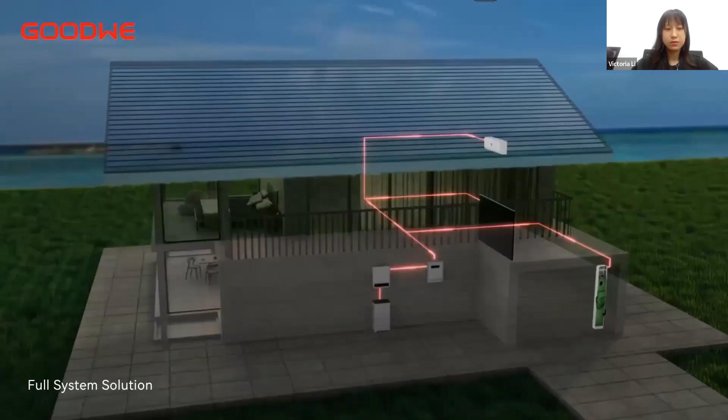Okay, hope you can get a general picture about Sunshine Tile after seeing this video. And this is some technical data about Sunshine Tile. The size of the Sunshine Tile is 1508 by 420 millimeters, and it weighs 11 kilograms. As you can see on this slide, there are brackets that go with this product because it is a necessary part for the installation of Sunshine Tile, and I will talk about it later.

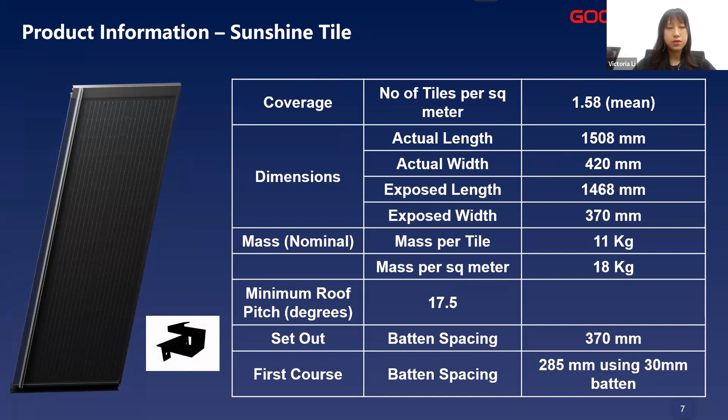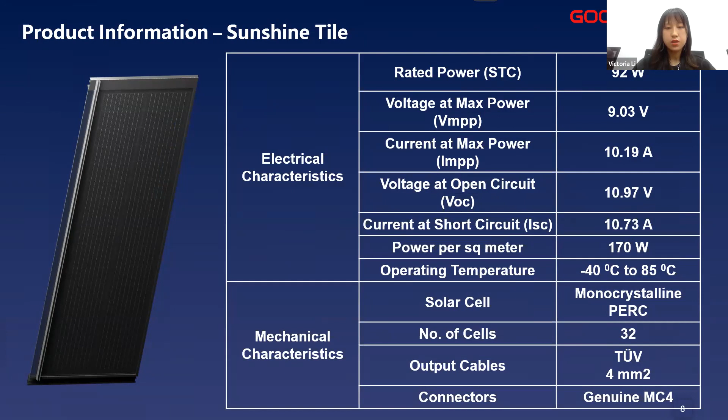And the power generation rate is 92 watts per piece, which is 170 watts per square meter. And the Sunshine Tile uses monocrystalline PERC solar cells. One piece of Sunshine Tile has 32 cells. And Sunshine Tile can integrate into the roof system. As you can see in this picture, this is a typical Sunshine roof system.

Here is a roof base, and above that is a layer of waterproofing barrier, and then the thermal insulation board, and then the wood or metal batten, and then another EPDM membrane. On top of the roof system are the tiles, the normal tiles and the Sunshine tiles, plus the ventilated cornice and ventilated ridge actually create a ventilation tunnel, because the temperature rising can affect the power generation rate of the PV product.

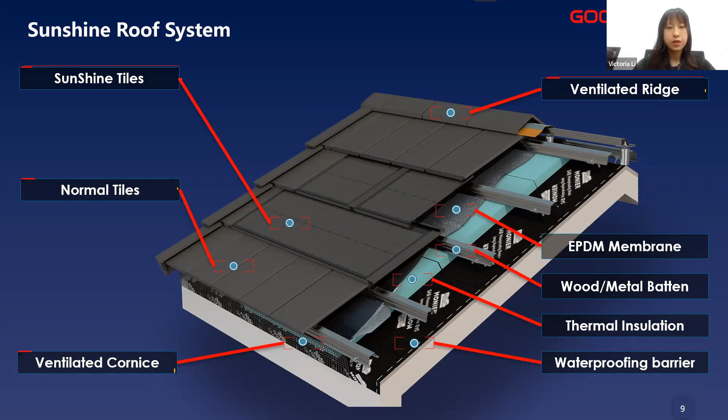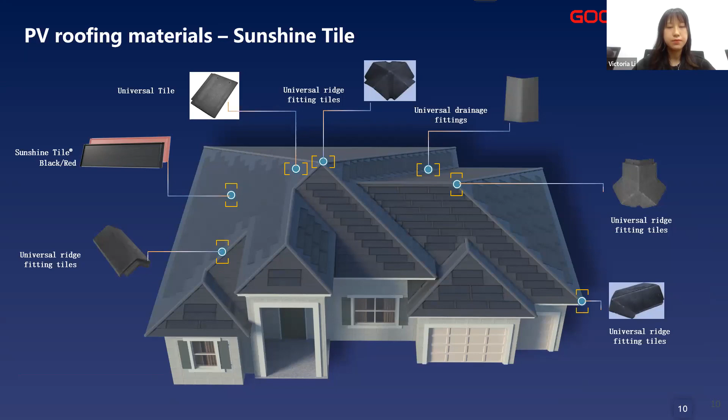And because Sunshine Tile can integrate into the roof system, that means it can be compatible with many accessory tiles, like normal tiles and ridge tiles and so on. So how do we install the Sunshine Tile? Here is an installation video.

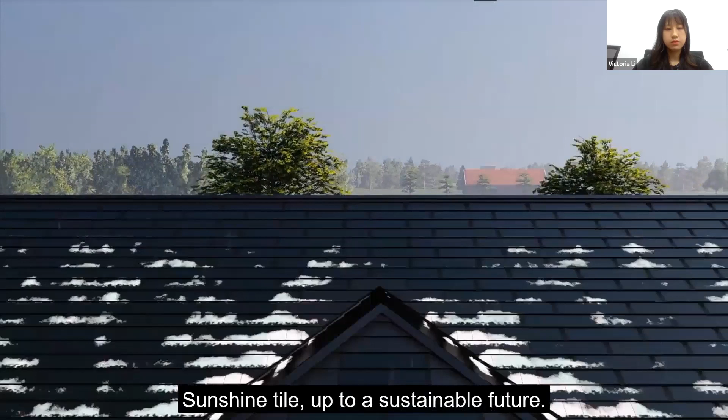Well, the installation and the replacement of Sunshine Tile is actually very easy. And you may notice in this video, there is a unique design in the installation of Sunshine Tiles: this bracket. The secret is this bracket actually forms a seesaw structure between the battens and the tiles. So this makes the whole structure steady enough against strong wind.

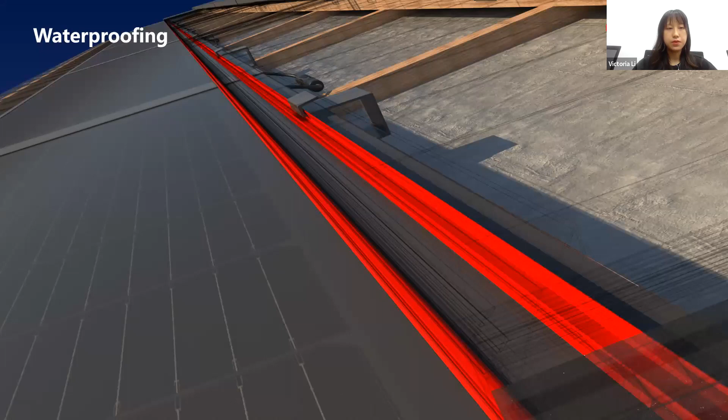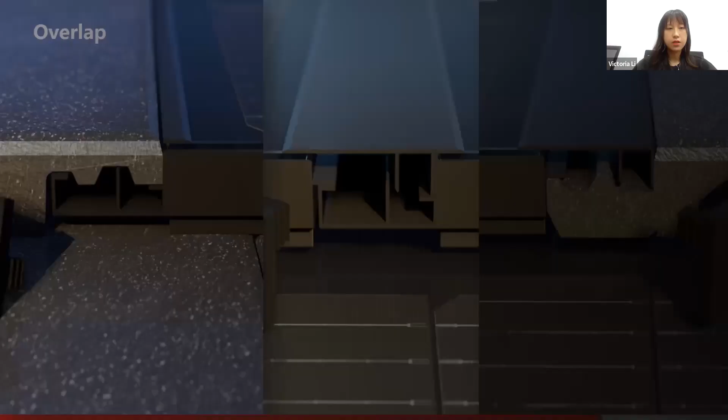And also, Sunshine Tile has double lines of waterproofing strips on the basis of the conventional pitched roof structural waterproofing function. These double lines of waterproofing strips can ensure that water won't get into the roof system. And this slide shows the overlapping of the Sunshine Tile. The left side and the right side pictures show how Sunshine Tile overlaps with the normal tiles, and the middle picture shows two Sunshine Tiles overlapping.

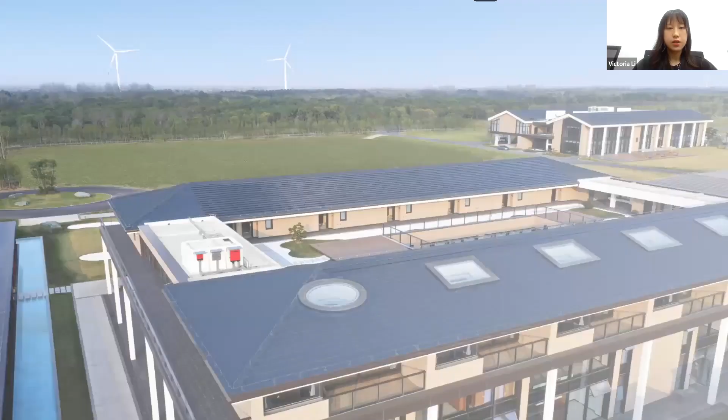Now we have two types of Polaris tile. The difference is they have adopted different sizes of the cell. One uses 166 cell and another uses 182 cell. And thus they have different sizes and different power generation rates. The smaller one is 300 watts, while the larger one is 365 watts.

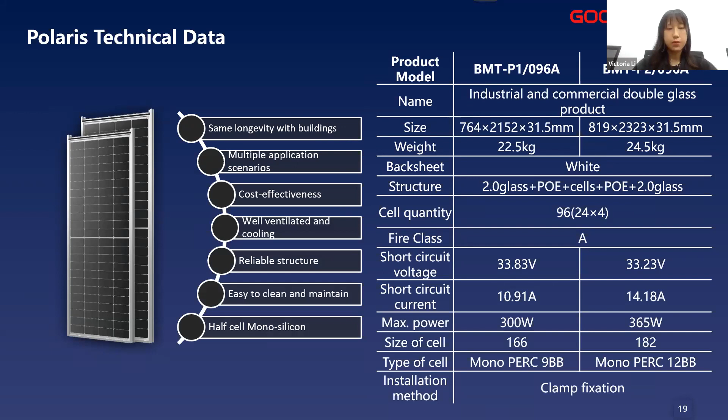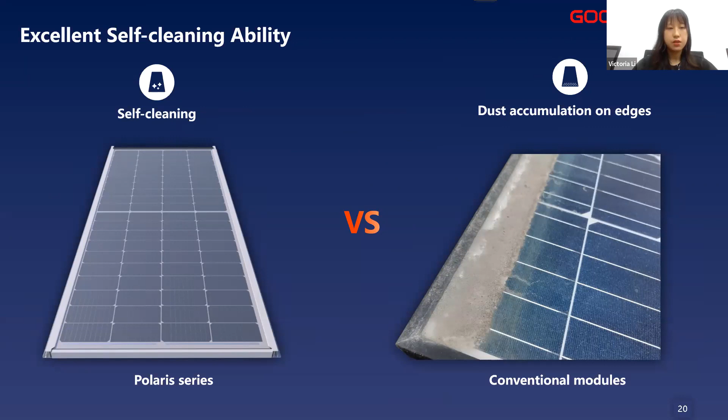When we compare the Polaris tile with conventional modules, we can easily find that the Polaris tile has better self-cleaning ability because of the frameless design on the bottom and top of the product that allows the rainwater to easily bring the dust down. And Polaris tile also has a better waterproofing function, because conventional PV modules adopt confluent centralized drainage. And when the rain is heavy, there is a great possibility that water may overflow.

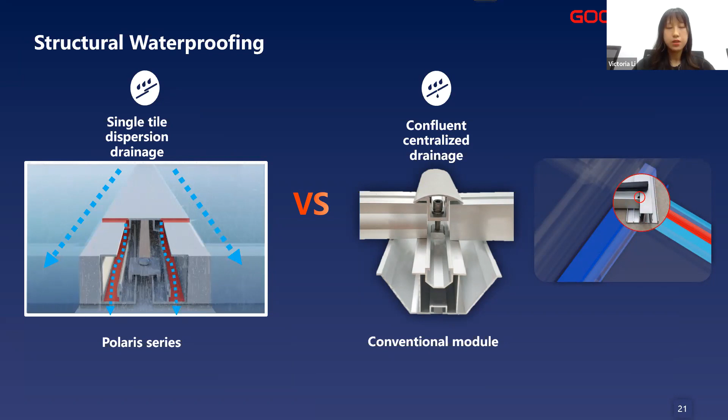But Polaris tile uses single tile dispersion drainage. And even if some water goes beyond the rubber, there is a small hole behind the rubber, so the extra water can get into the drainage through this hole. And also, the Polaris tile adopts the double chamber reinforcement design, while the conventional PV module only has a single chamber. So under the mechanical load test, the Polaris tile can maintain steady, while the conventional PV module showed severe deformation.

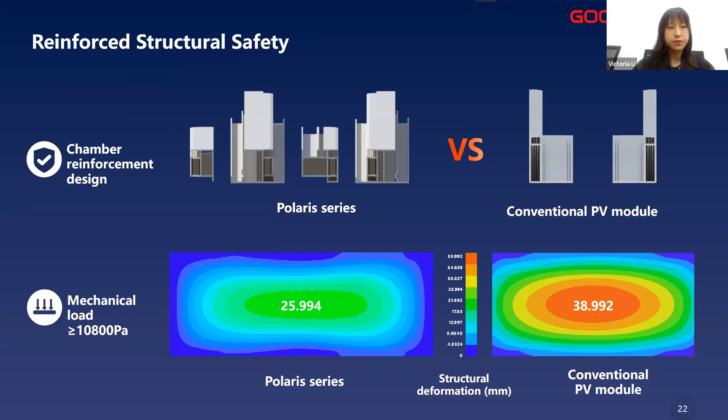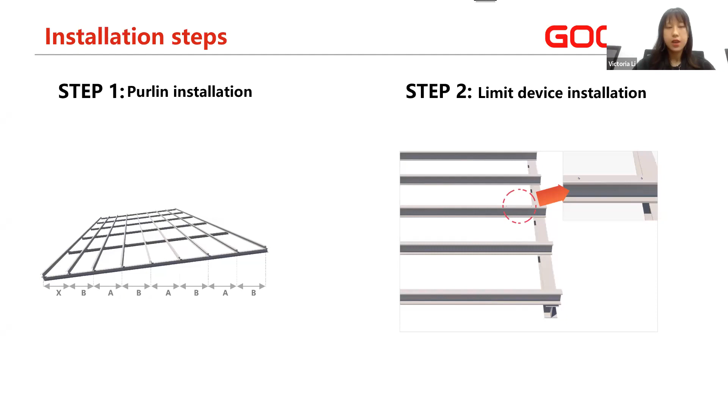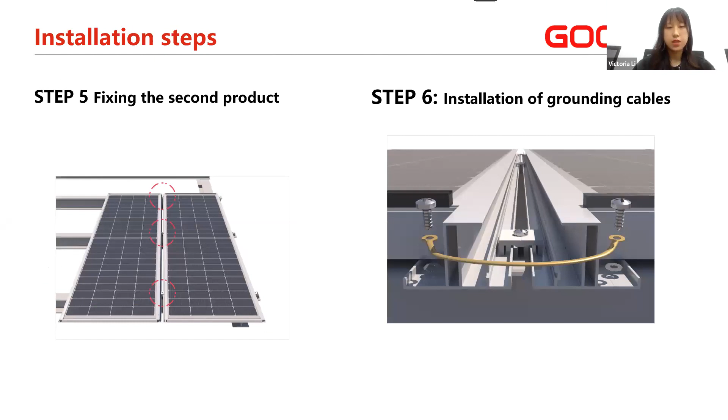Then I will go through the installation steps quickly. So when we install the Polaris tile, the first step is to install the purlin, and the next step is to install the limit devices. And then we install the first product and use the pads to fix the product on the purlin. And then we install the second product. And also you use pads to fix the second product, and then install the grounding cables.

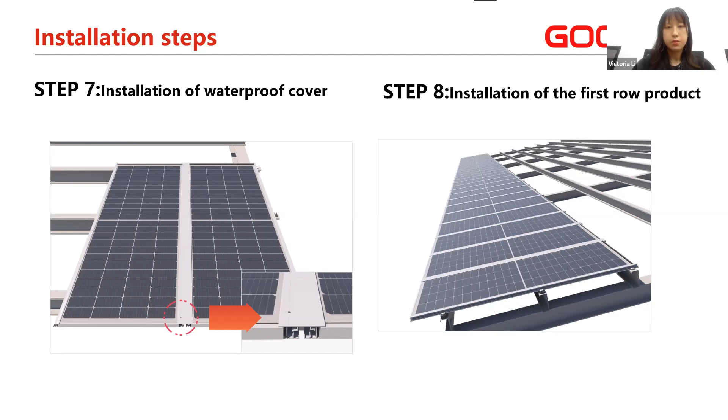And then install the waterproof cover. And when we finish the first row products from right to left, we start to install the second row. And we install them from bottom to top until the whole project is completed.

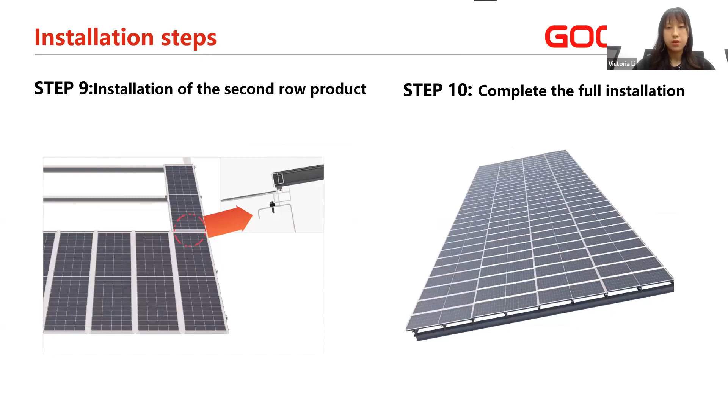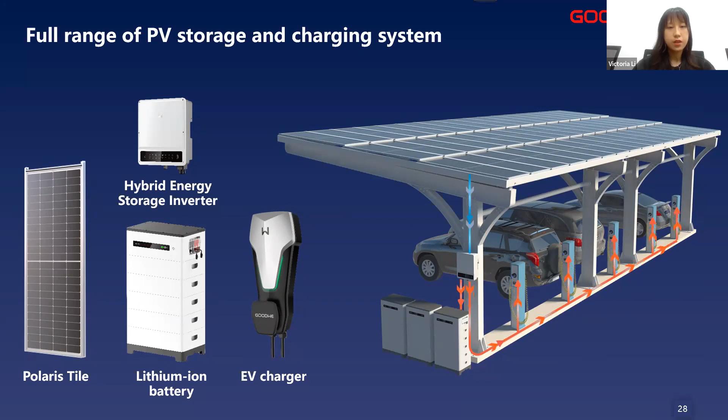And one thing worth mentioning is that Goodwe can provide a full solution of PV storage and charging system like this picture shows. This is a carport because we have a full range of PV storage and charging products: the Polaris tile, the inverter, the battery, and the EV charger. And this is a real project in China, a carport. The Polaris tiles are applied on this carport.

So the main features of the Polaris tile would be waterproof, safe, and it is also a very important part of the PV storage and charging system. The last product would be the Galaxy lightweight product. Let's see a video about this product first.

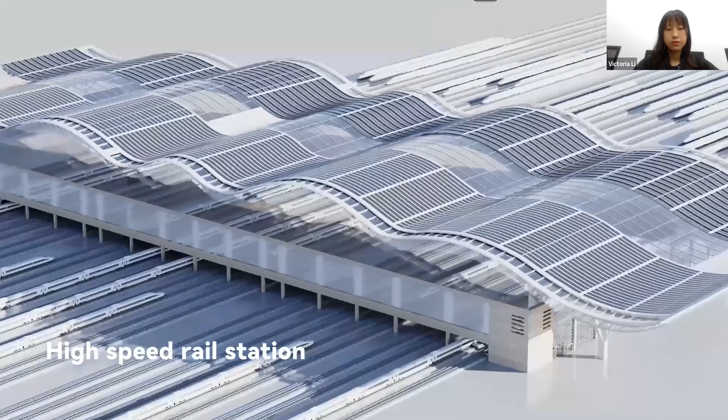Yes, this is our Galaxy product. And these are the technical data about the Galaxy product. The size of the Galaxy is 777 by 2319 millimeters, and it only weighs 6 kilograms per square meter. And the power generation rate is 315 watts per piece of Galaxy. And as you may notice, there is a TPO waterproofing membrane that is integrated into this product itself.

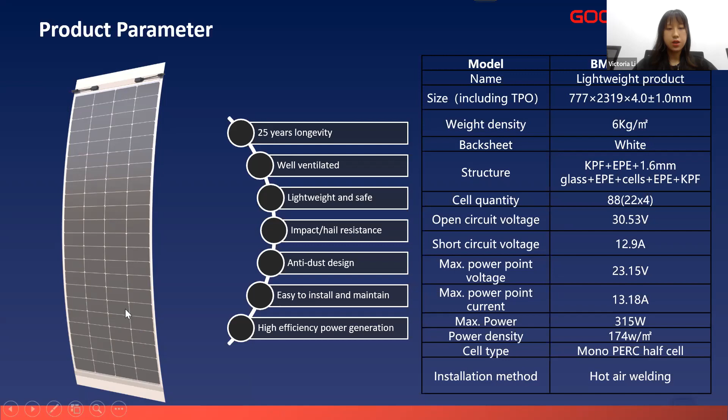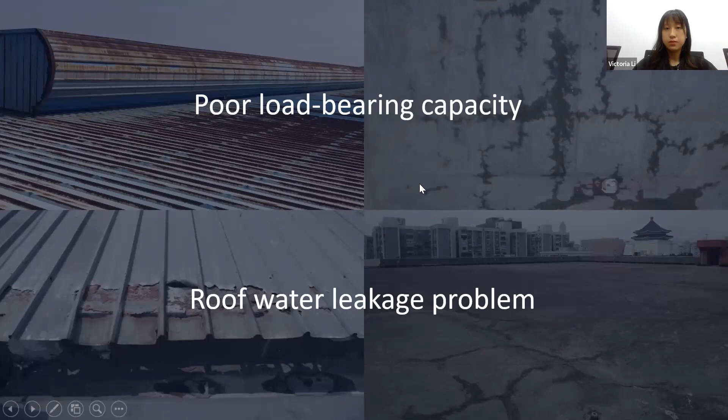So the Galaxy product is designed for solving the poor load bearing capacity and the water leakage problems of the industrial roof. And how Galaxy can solve these problems, we'll talk about later. So this is a typical single ply roof system that Galaxy can be applied on. Above the roof base, there is the insulation layer, and vapor barrier, and then the thermal grilles, and then the TPO waterproof membrane. And on top of that is the Galaxy lightweight product.

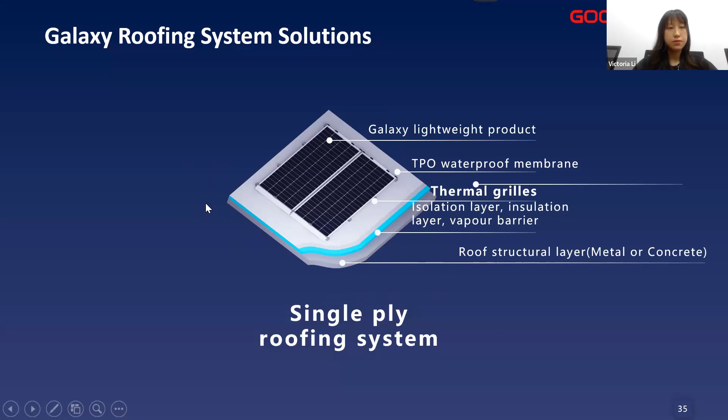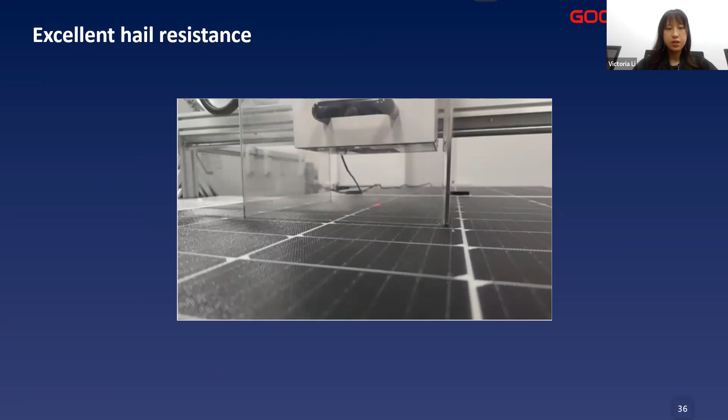And we also have done many tests on the Galaxy. This is the hail resistance test we have done. And unlike flexible PV products, we add a 1.6 millimeter glass encapsulated in this product, which makes it much safer and steadier. So after the hail test, the Galaxy product is as good as new. And we also did the wind test on this product. This product can stand strong wind and is firmly bonded to the roof surface.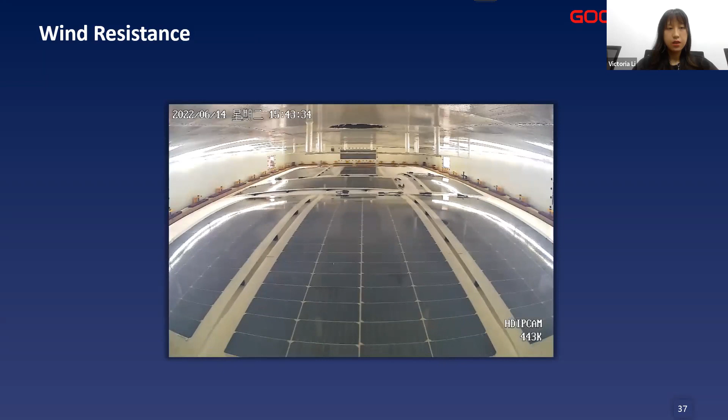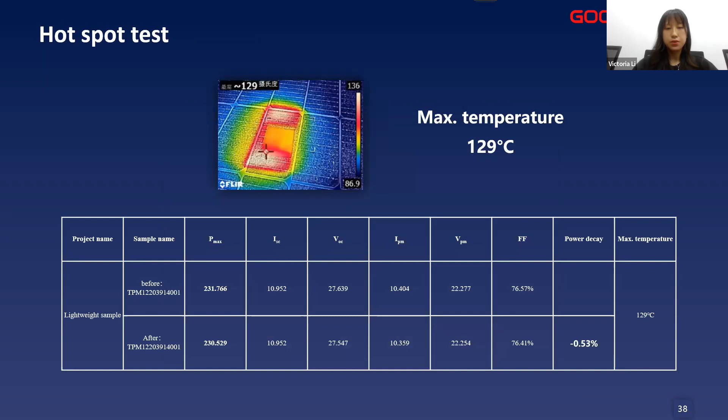And we also did the hotspot test with the maximum temperature reaching 129 centigrade. The power generation rate only reduced 0.53% after the test. And because rising temperature can affect the power generation rate of the product, ventilation is extremely important. The metal roof actually already has this corrugated structure for ventilation. But for the flat roof, we use the grills to create a ventilation space between the product and the roof.

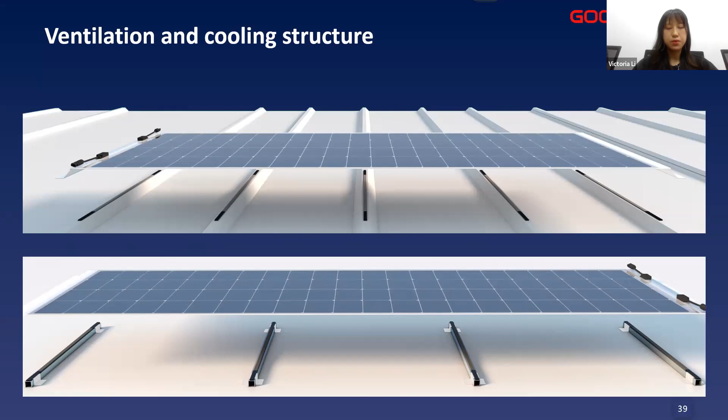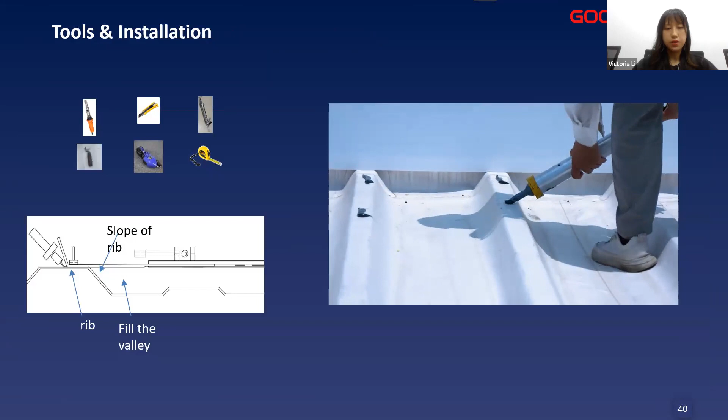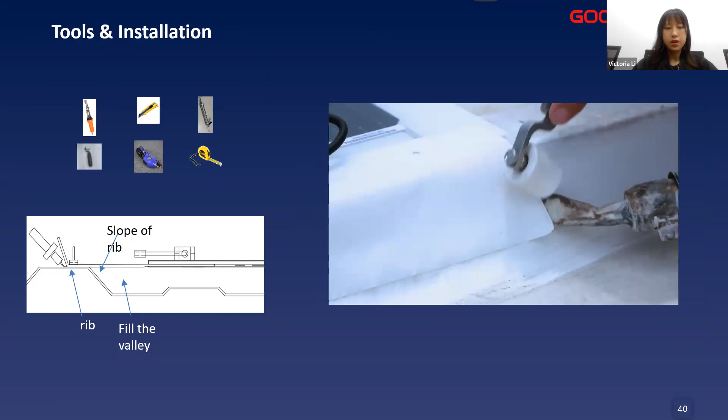To install the Galaxy, we only need to use several simple tools. And here is a short video about the installation of the Galaxy. We only need to lay the glue on the ribs and then put the product on and use a hot air welding gun to weld the TPO waterproof membrane on the product with the TPO on the roof surface. It's quite easy and quick.